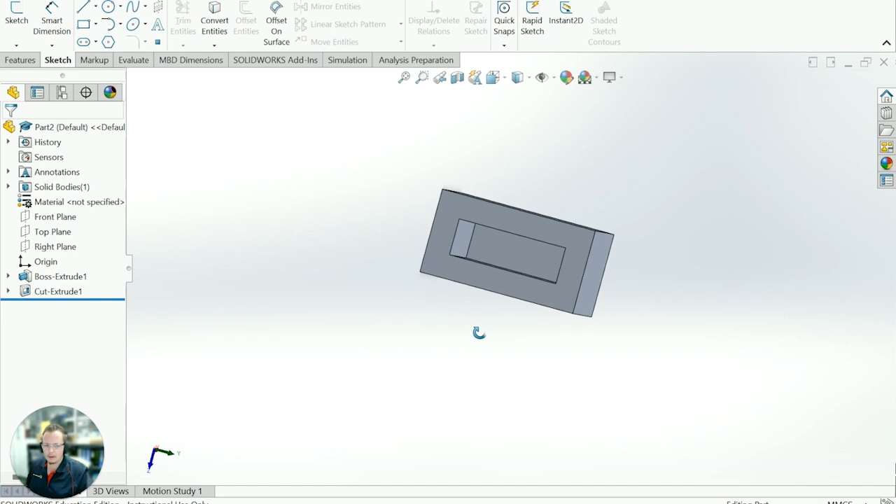In our last tutorial we created the hole for the USB to slide into. You can see we've created this hole that's the exact length it needs to be to allow the USB end to be sticking out so they can plug in.

Now what I'm going to do is rotate to the top here, and make an indent at the top surface so that a name tag can be laser cut out and stuck in here, so we can give this USB a name.

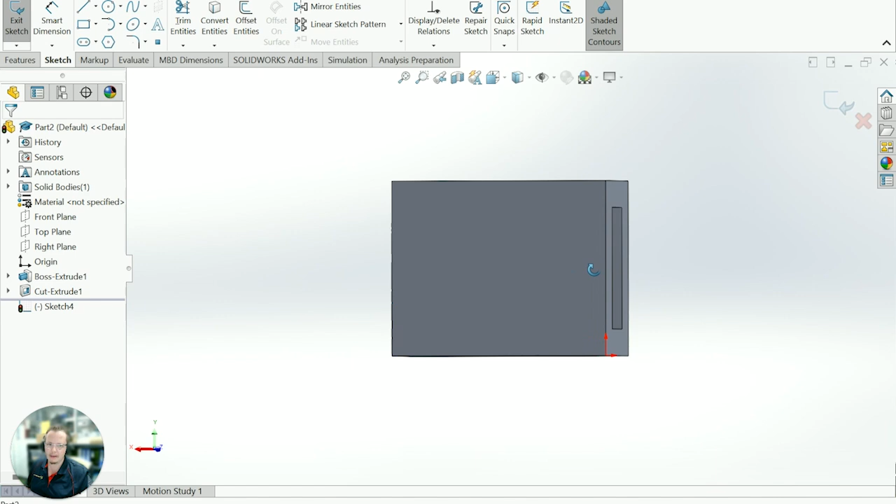First, after rotating around to that top face, I'm going to click on Sketch in the Sketch tab, and select the face I want to draw on. It does like to do this little rotate thing, so now my hole is on the right, that's okay. If you rotate around and want to get it back front-on, just press the space bar and click on that front face, or this one's saying it's the back face, but that's okay.

From here, what we're going to do is draw a rectangle. We've already selected that this is the surface we're going to draw on, and I'm just going to draw it anywhere in the middle here.

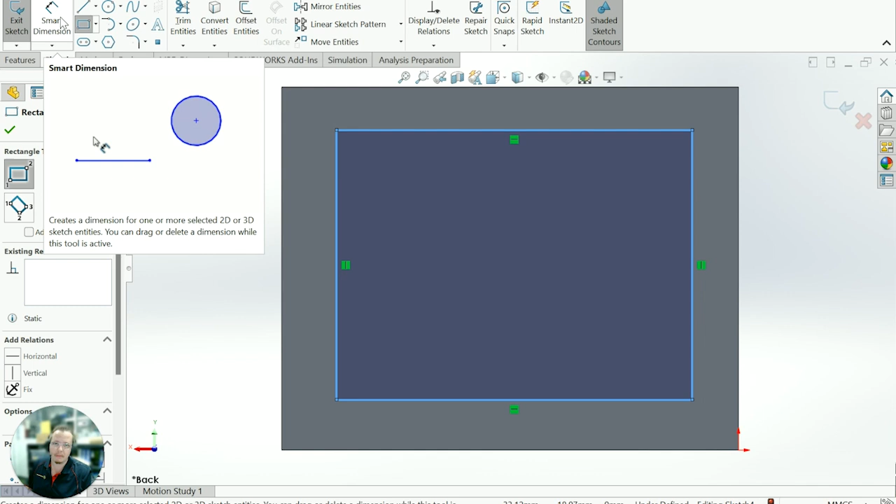Now, on your task sheet, I've given you the dimensions of how big your name tag and indent need to be. So what I suggest is you have a look at your task sheet, and you'll find that the length of your name tag needs to be 18 millimeters.

The height or width of your name tag needs to be 12. And then the depth or thickness needs to be 2 millimeters, which we'll get to in a moment's time.

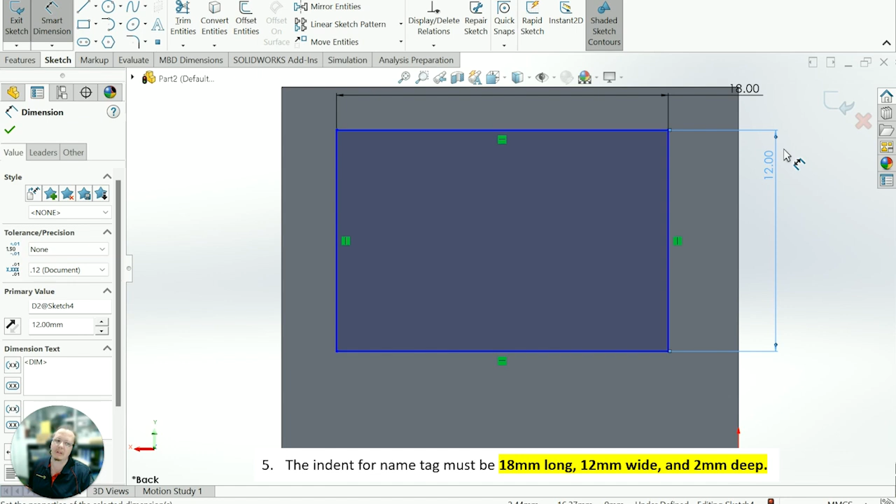But now that I've got my name tag indent drawn here, and it's the right length and width, I need to position this in a place that I'm happy with.

Now, you could just deselect Smart Dimensions and just click and drag it into place wherever you're happy. But as I've said before, Mr. Letton is a bit of a perfectionist.

So what I like to do is put it directly in the middle. We can measure, if we can't remember, the length of our housing and the width of our housing, so we know where we can find the middle.

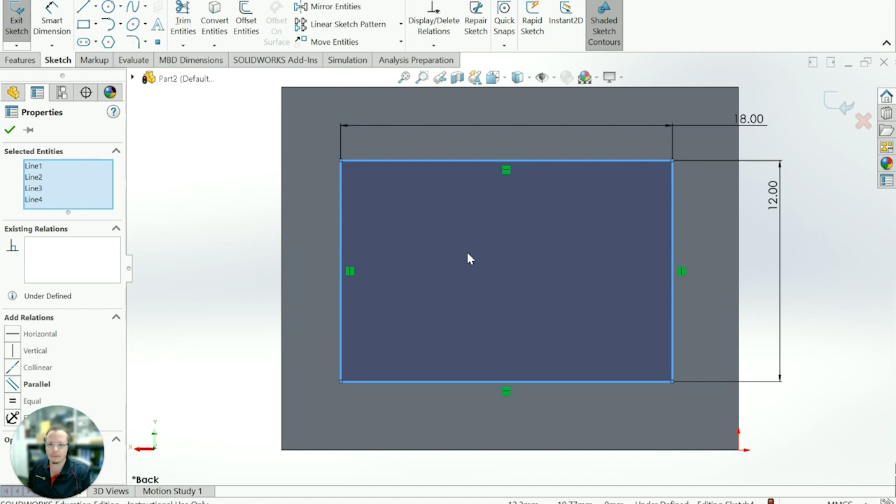So I can go to Evaluate, click on Measure, and this is all within the same sketch here. Now, it's highlighted my sketch because that was the last thing selected. I don't want to measure my sketch, so I'm just going to deselect that.

Okay, so select off into the distance here, and it will deselect these lines. What I want to do is figure out the length of this line here. As soon as I click on it, it tells me this is 19.7 millimeters in length.

Or in this case, the width of our housing. I click off into the distance again and it deselects it. If I select the top or bottom line - it's a little off screen, so zoom out - it gives me 24.8. Here's where I'm going to do a little bit of math.

But again, SOLIDWORKS can do this for us, so let me show you. This is 24.8, this is 18. So I'm going to deselect my measuring tool, remembering this is 24.8.

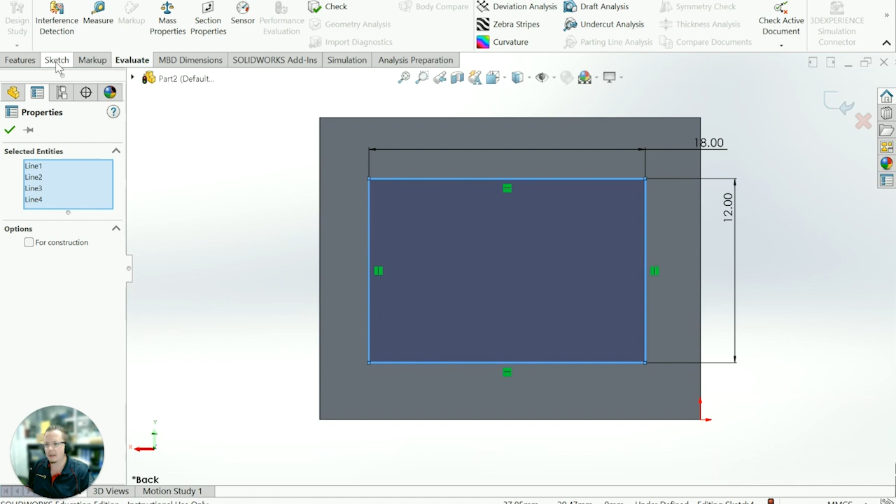I'm going to go over to Sketch, Smart Dimension, and measure from here to here, edge to edge, because I want to put it right in the middle from left to right. At the moment it's 3.21 millimeters from the edge. I'm going to change that by clicking on it and typing in my total length for the housing, which was 24.8.

Then I'm going to minus the 18 millimeters, that's the length of my name tag. That gives me the remainder amount of space, both on the left and the right combined. We need to even that evenly across both sides, so I'm going to put in a divide, or /2.

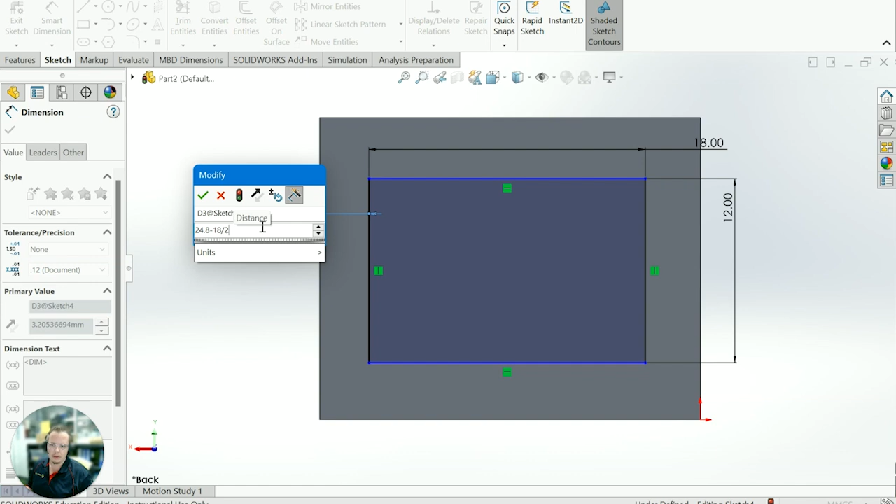Let's see what it comes up with. Okay, that did not work. Now I know why that didn't work, and those that are mathematicians in the class might also figure out why. If I double click on that again, it's just going to give me the number, so I need to type in this equation again.

So I'm going to go 24.8 minus 18. Now whatever the result of that is, I need to divide by 2. So I actually need to put this equation here in brackets. I'm going to put that into brackets, then say /2, or divide by 2.

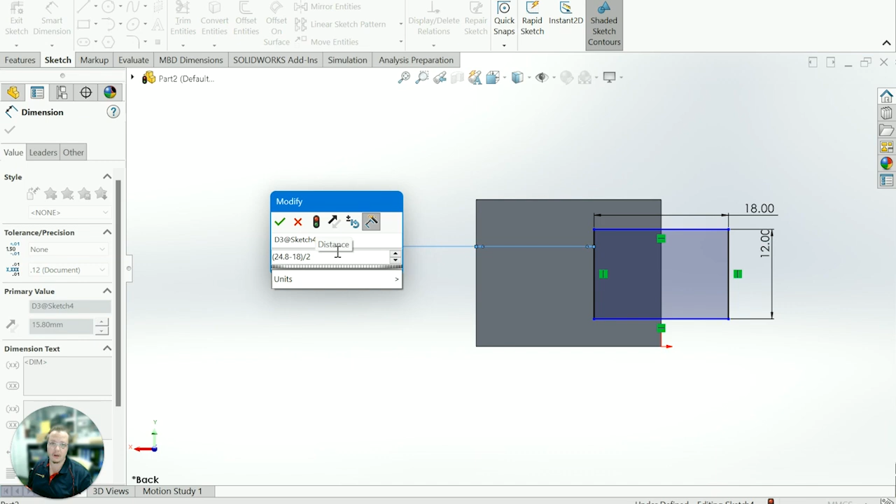Now if I hit enter, it's brought that 15 millimeters down to 3.4. If I double check by clicking on this one and this one, you can see 3.4 on both sides, meaning that's directly in the middle. I'm going to hit escape because I don't want to over-dimension my part here.

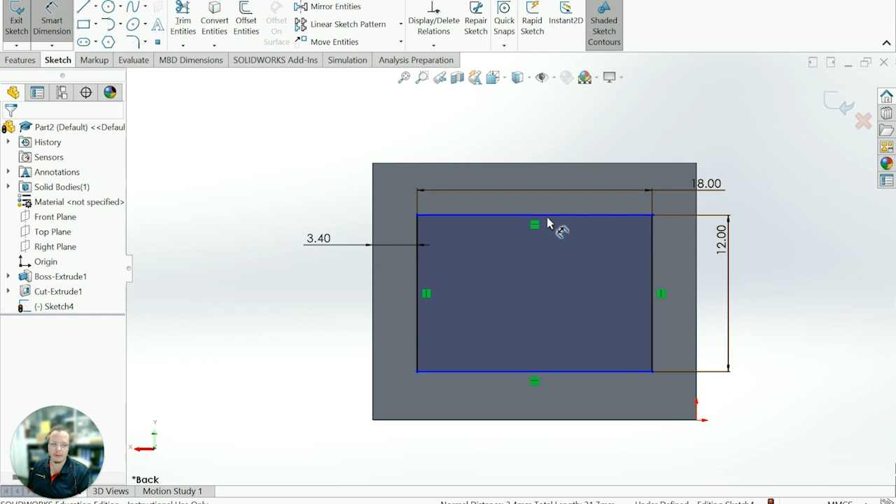So I'm going to do the exact same for top and bottom now, so it's going to be in the very middle of my housing. Let's have a look. We're going to go to Evaluate Measure, and I select this one - it is 19.7. Hit escape.

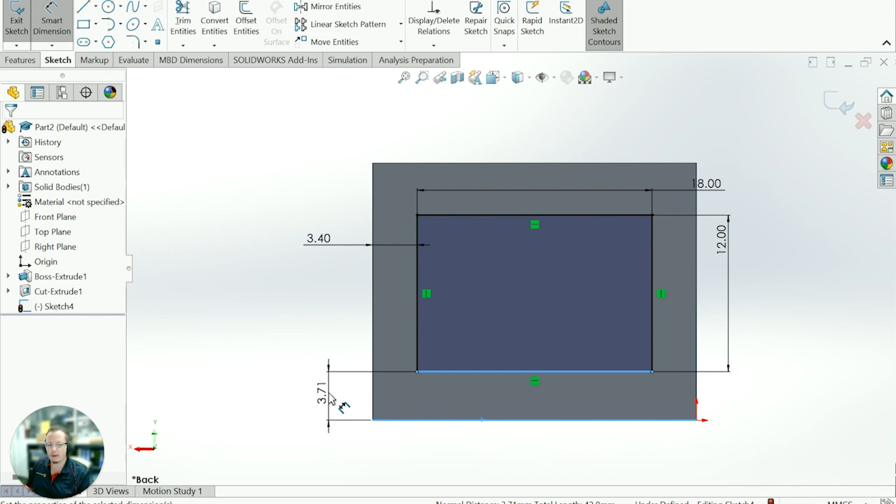Now I'm going to go over to Sketch, Smart Dimension, and do the bottom this time - this one and this one. I want to tell it to be so far away from the edge. It's currently 3.71. I know that my housing's total width is 19.7, and I need to minus the width of my name tag, which is 12. Now I've got to remember to put this equation in brackets.

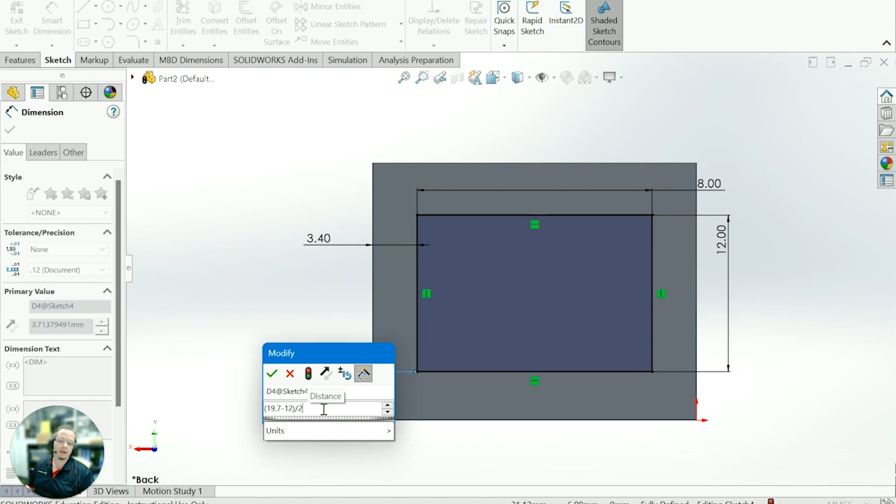And then we can put in the divide by 2, or /2, because we need to divide the answer to that equation by 2 to evenly split it across both sides. I'm going to hit enter. That gives me 3.85. So again, to check it, click on that side - 3.85, perfect. I'm going to hit escape.

Now you can see there are no blue lines, just black lines, meaning I cannot move this rectangle anywhere. Click and drag - nope, not moving. It's locked into place, and I know for certain that it's dead in the middle.

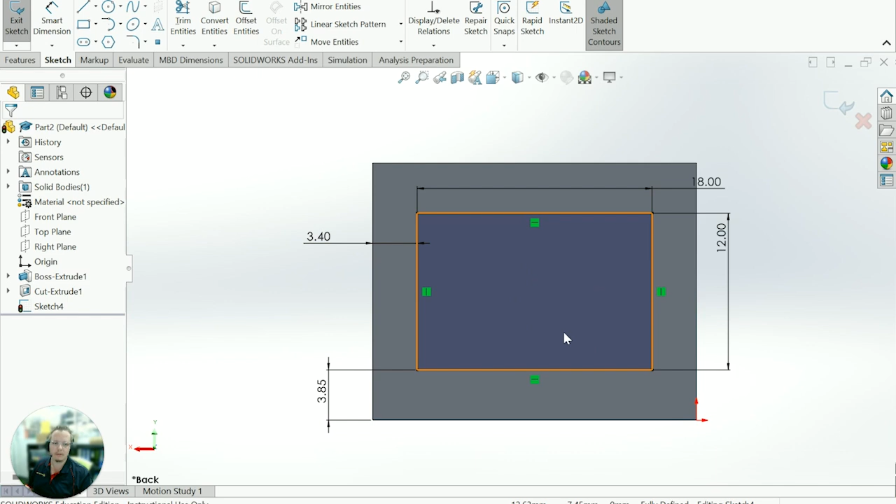From here, we just need to make that indent. So we're going to go over to our Features tab now, as we're going to be going from drawing 2D shapes into manipulating 3D shapes. We're going to Extrude Cut, and we're going to extrude cut at 2 mil, that is the thickness of our name tag, or a little bit less than that. So I'm going to put in 2 and enter.

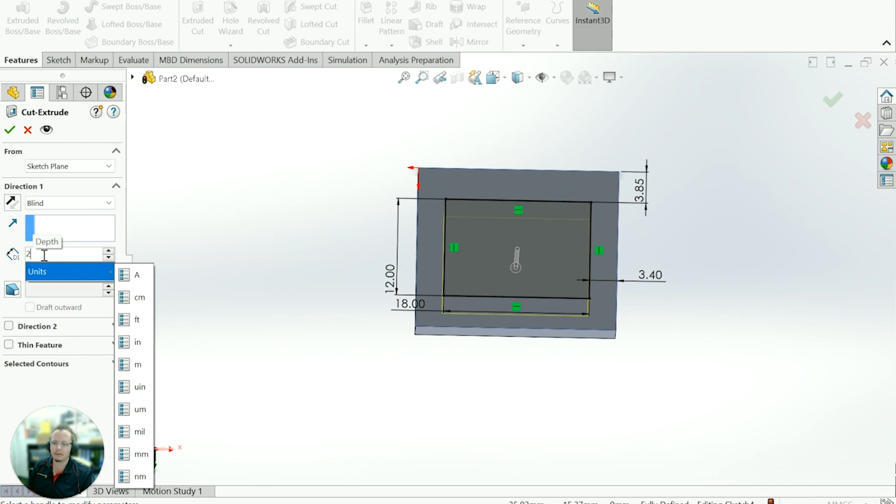You can see now that it does cut in a bit, but if we rotate it around, you can see it doesn't cut in past the wall, which is what we want. So 2 mil, click on the tick to confirm, and there we have it - we have an indent ready for a laser cut name tag to be stuck into place.